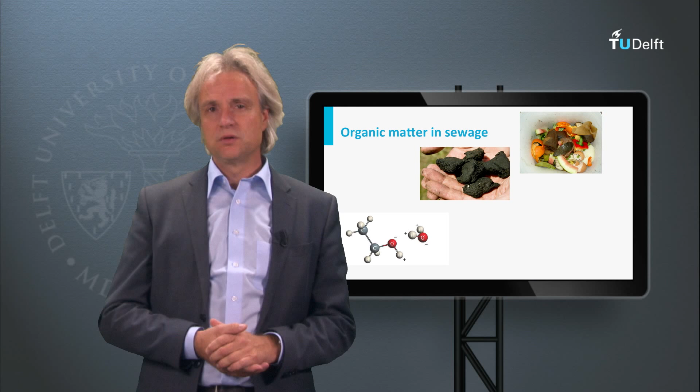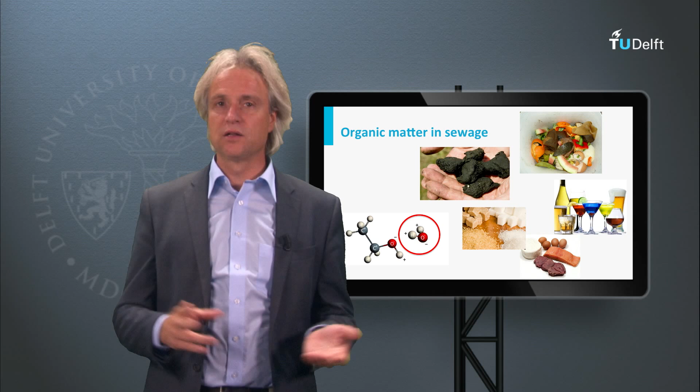The largest fraction of contaminants in domestic sewage consists of organic pollutants. Since water is a polar compound, it's an ideal solvent for many organic pollutants associated with our food chain, such as sugars, proteins, ionized compounds, and alcohol. Can you think of an organic compound that hardly dissolves in water? Maybe fats. The lower the polarity of a compound, the lower its solubility, but we still find them in our sewage and thus in our treatment system.

In addition to dissolved compounds, the used water carries a lot of suspended matter. These suspended solids can be organic in nature, such as food leftovers thrown in the kitchen or fecal matter from our toilets, but also inorganic, such as clay and sand particles, or when flows are high, even small stones.

Water is mostly used for transport of reactants to, and transport of contaminants from, the site of industrial and/or agricultural production or household appliances. The carrying capacity of water is determined by a number of factors. Some relate to the physical-chemical nature of the pollutant, such as polarity, maximum solubility, and degree of ionization. Others depend on the type and extent of the sewage system, local weather conditions, and flow velocities in the conveyance pipes.

Now think for yourself and imagine at least 10 compounds that come to mind that you certainly will find in the sewage.

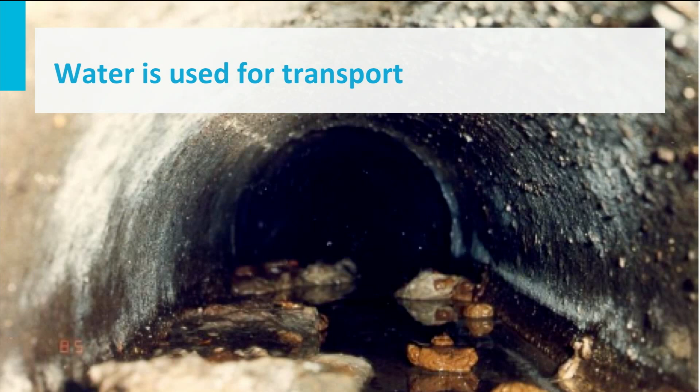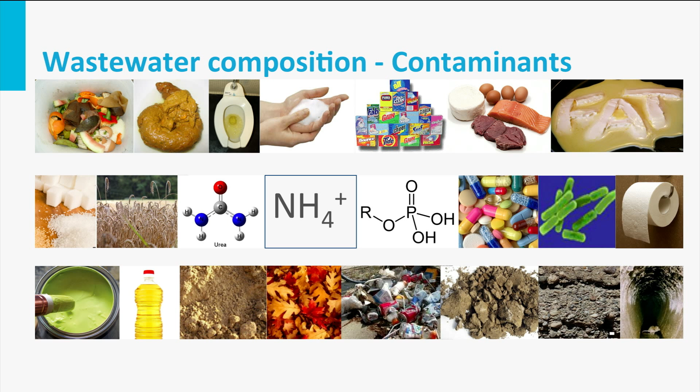Kitchen waste, fecal matter, urine, soaps, detergents, proteins, fats, sugars, fibers, urea, ammonium, phosphates, medicine residue, pathogenic bacteria, toilet paper, chemicals that don't belong there such as paint, vegetable oil, sand, leaves, tree dust, clay, stones, mice, rats, everything. I guess that matches more or less with your imagination, right?

Now the question: why should we remove these compounds? Why are they harmful?

Discharge of organic compounds leads to surface water pollution, possibly resulting in oxygen depletion. The actual impact on the dissolved oxygen concentration depends on the composition and concentration of the specific compounds, as will be discussed in the coming lectures. Since the exact nature of the organic compounds is not known, organic matter is determined in analytical tests. Based on the type of test, the organic matter content is expressed in grams of chemical oxygen demand, or COD, or grams of biochemical oxygen demand, or BOD. The fundamental background of these tests will be discussed in another lecture.

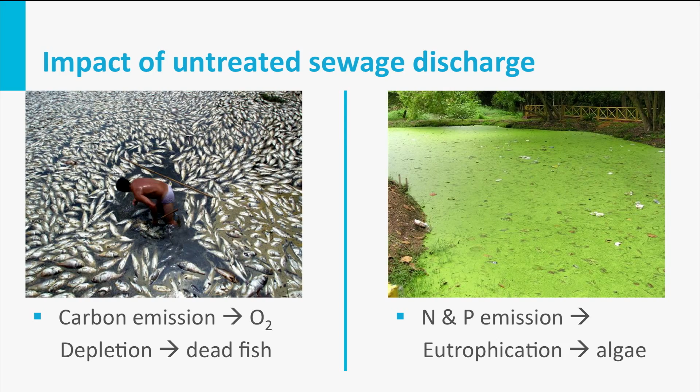In addition to carbon pollution, the sewage is full of nutrients, nitrogen and phosphorus. The presence of these fertilizers in surface water leads to eutrophication, resulting in high algae growth or algae bloom. By the massive growth of algae, other species will hardly have the chance to flourish in these waters, leading to a loss in species diversity. Moreover, after starvation, the dead biomass will also lead to oxygen depletion in the receiving surface waters. Therefore, effluent restrictions of sewage treatment plants generally include both organic matter and nutrients.

The natural carbon, nitrogen and phosphorus cycles, as well as the imbalances in these cycles, will be explained in much more detail when we discuss the biological processes in sewage treatment plants.

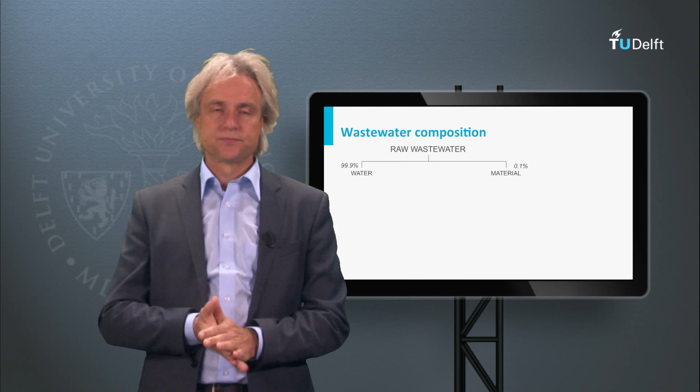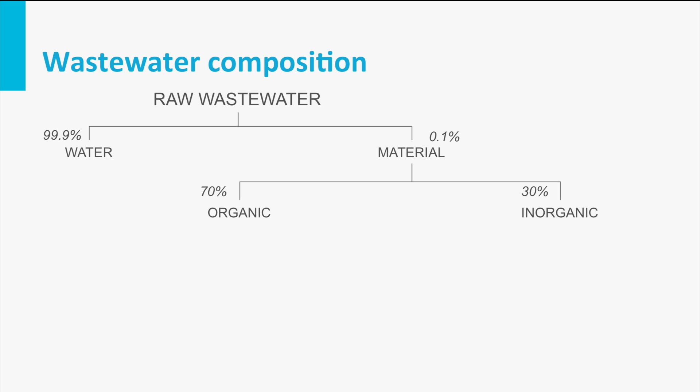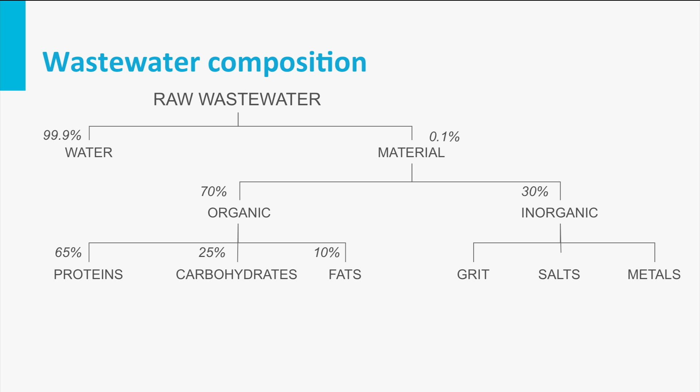Back to the wastewater. Wastewater is composed of almost 100% water. The polluting mass is only a very small fraction of the total mass. Of the polluting mass, about 70% is organic and about 30% is inorganic. The organic fraction consists of 65% proteins, about 25% sugars, and about 10% fats. Local conditions may differ distinctly from these average values. The inorganic fraction consists of sand and grit, salts, and metals.

Part of the pollutants are present in soluble form, whereas a large part is suspended. How do we quantify the solids present in the sewage? Suspended solids quantification is based on their settleability, their size, and their organic or inorganic nature.

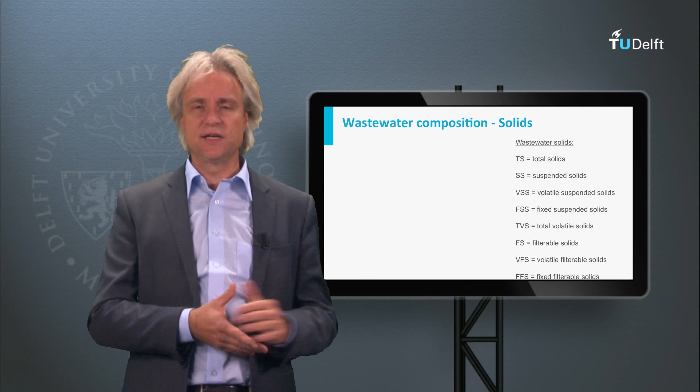Now let's start with a sewage sample and first check what part of the solids is settleable. The settleability of the solids is an important characteristic when we apply downstream solid separation. Under standardized conditions, the amount of settleable solids is determined by using an Imhoff cone.

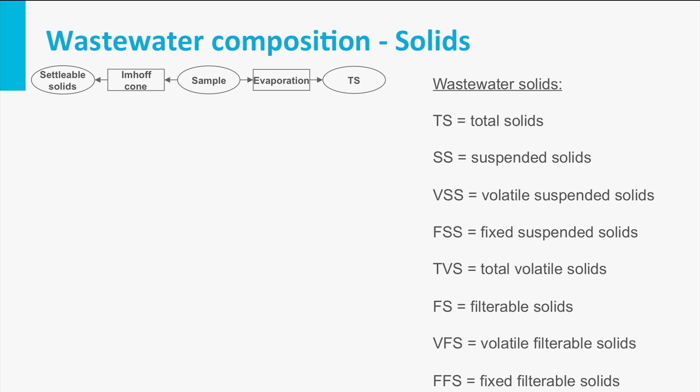Alternatively, if we evaporate all the water of the original sample, the residue is called total solids, or TS. By means of a filter with a certain mesh size, we may differentiate between the filterable dissolved solids, like ions or sugars, and the suspended solids.

If we burn the solids fraction in the muffle oven at 550 degrees Celsius, we obtain the volatile suspended solids, or VSS, and the ashes, or fixed suspended solids, FSS. The oven-treated filterable fraction will give us the volatile filterable solids and the fixed filterable solids.

Now, by summing the appropriate fractions, as shown in this slide, we can close the mass balance and arrive at the total solids again, which must equal the initial amount after evaporating all the water.

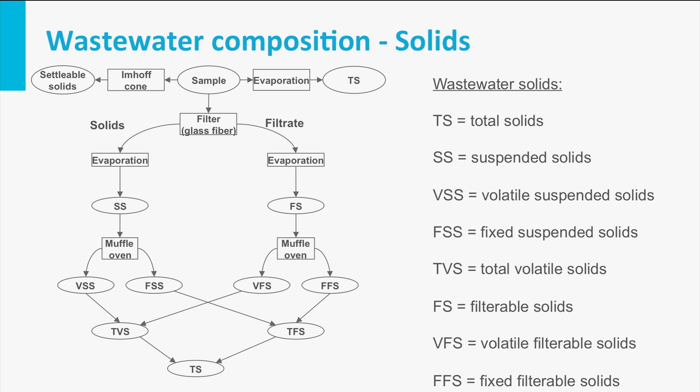A practical example is given in this slide. Just have a close look, stop this video, and do these simple calculations by yourself.

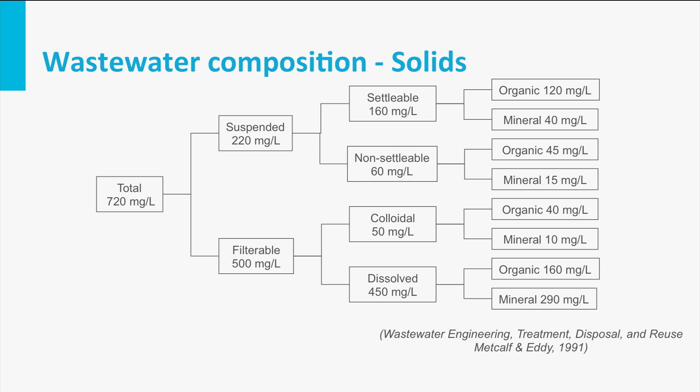The characterization of sewage is important to understand what impact the discharge of untreated sewage will have on the environment. Alternatively, sewage characterization is performed in order to be able to dimension a sewage treatment plant.

The sewage characteristics are firstly dependent on the type of collection system or sewage system that we apply. Flow rates and expected fluctuations depend on the extent of the sewerage and whether rainwater is collected by the same system, as we discussed in the previous lecture.

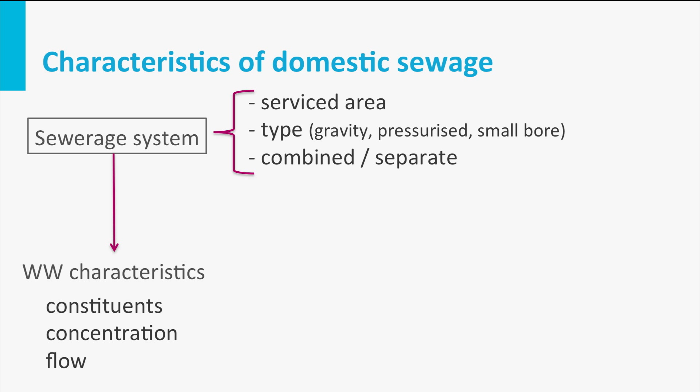The flow and pollutant concentration are then used to design the treatment plant. After treatment, the effluent is again characterized in order to check whether discharge or reuse standards are met.

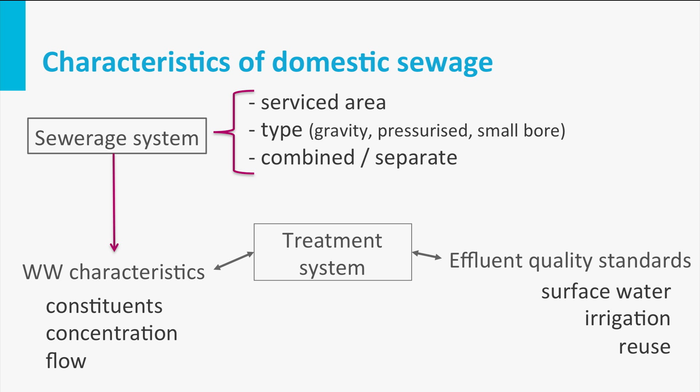The present slide lists the average concentration of key pollutants in sewage in the Netherlands. In addition to BOD, COD and suspended solids, also concentrations of nutrients, nitrogen and phosphorus are given.

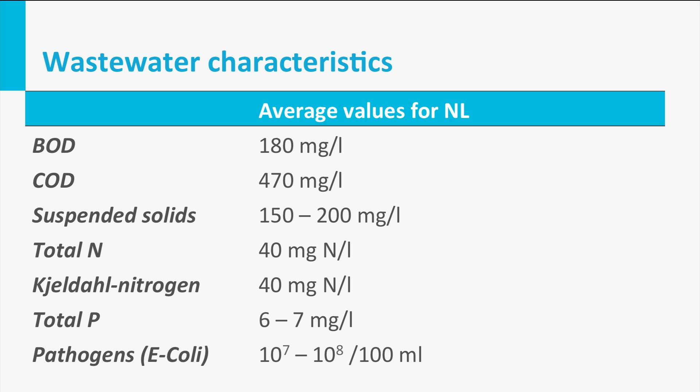Both nutrients can be present as inorganic compounds, such as ammonium, nitrite, nitrate, orthophosphate, or they are bound to organic matter. Particularly the presence of reduced nitrogen compounds needs to be carefully assessed at the STP in both the influent and the effluent, since reduced nitrogen needs to be oxidized in the reactor before discharge to the environment.

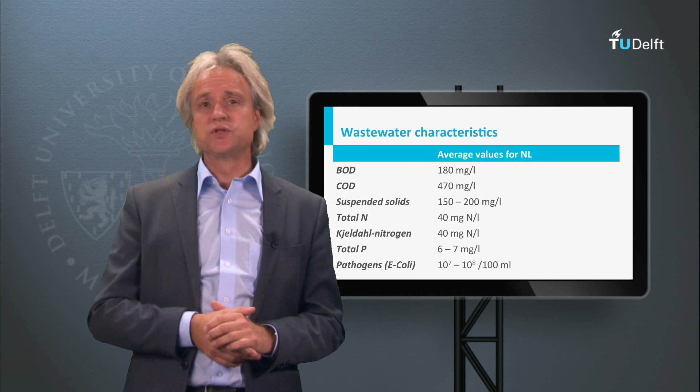The total amount of reduced nitrogen is measured by the Kjeldahl method, a destructive technique in which all reduced N is made free from organic matter. The released organic N, as well as the ammonium, is measured in this test.

What does it mean that the concentration of total N and Kjeldahl N are about the same in the sewage?

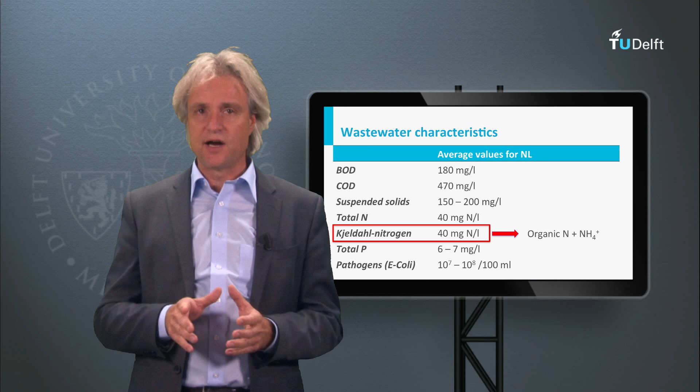For phosphorus, generally total P is measured, which includes both the phosphorus bound to the biomass and the free reactive orthophosphate.

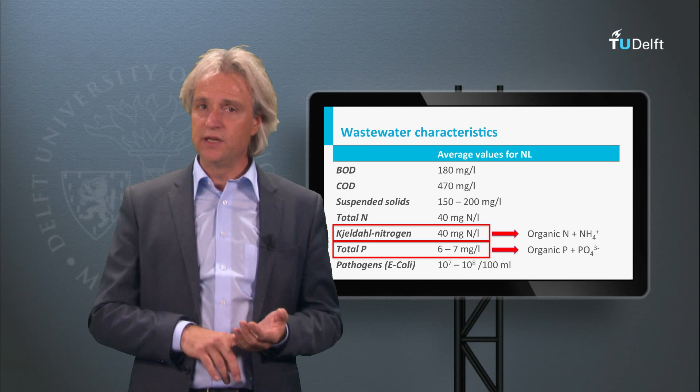Our sewage can be characterized as dilute, having the following average concentrations: BOD of 180 mg per liter, COD 470, Kjeldahl nitrogen 40, total N 40, total P 6 to 7, and suspended solids 150 to 200.

The large presence of suspended solids in the influent indicates the rather complex nature of organic pollutants entering an STP.

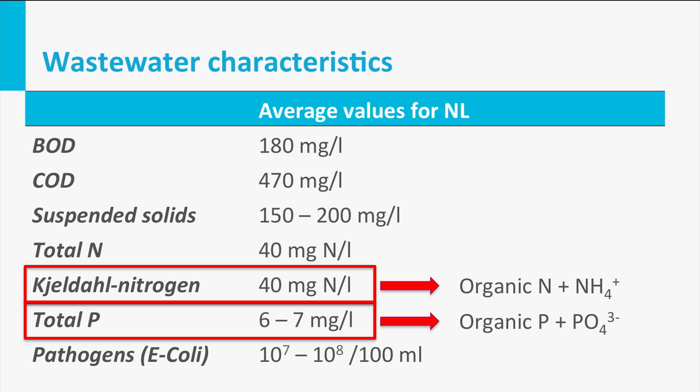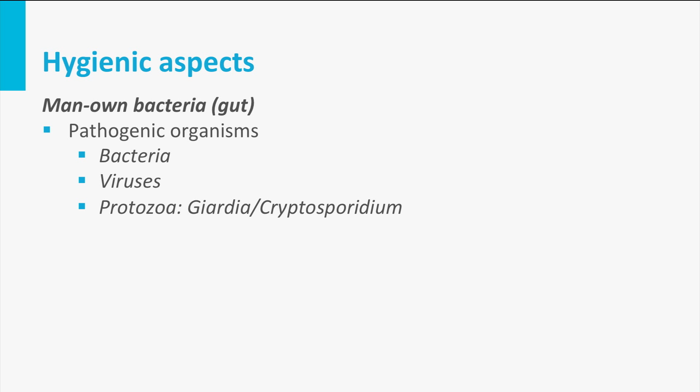Next to the biochemical compounds, the influent is contaminated with huge numbers of human pathogens. The average pathogen concentration, measured as the number of indicator organisms, E. coli, is about 10 to the 7, 10 to the 8 per 100 ml.

In addition to E. coli, the influent contains high numbers of other bacteria, viruses, and protozoa like Giardia and Cryptosporidium. During activated sludge treatment, no more than 1 to 2 log units of pathogenic organisms will be removed.

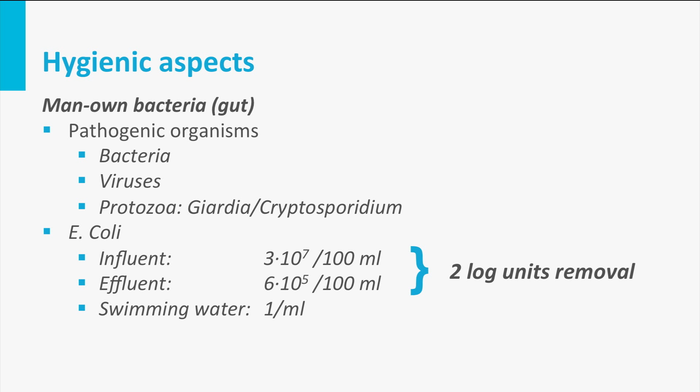Notably, pathogens are not removed in our sewage treatment plants. Only in those cases where the effluent is discharged to surface water where public bathing is allowed, pathogens need to be removed to less than 1 per ml.

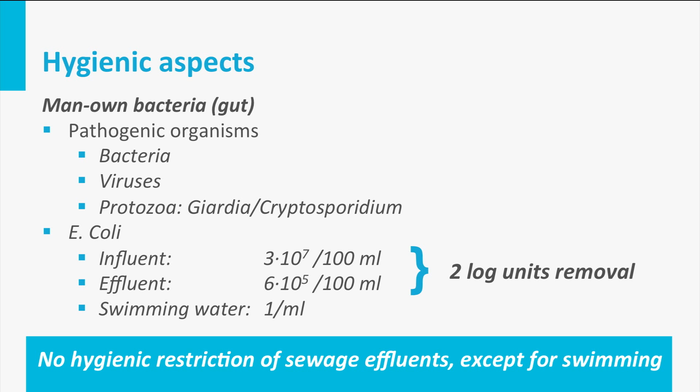You can imagine that these large differences will impact the type and design of the required treatment plant. Also, climate conditions, such as ambient temperature, will have an impact on system layout and process design.

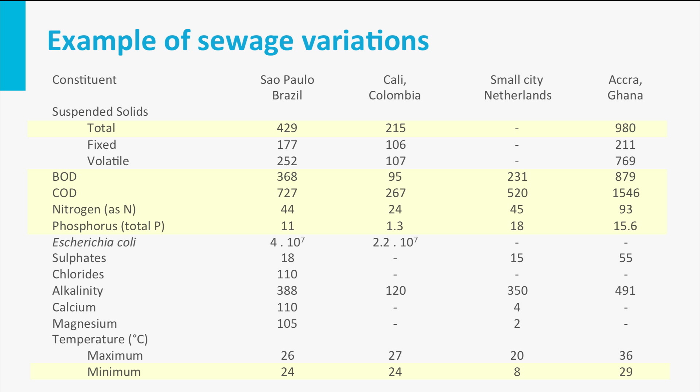And what are the criteria that should be reached in the effluent of the STP?

Since the installment of the Dutch Water Service Act in the 70s, the oxygen-requiring pollutants and suspended solids were restricted for discharge. Effluent restrictions for BOD was 20 mg per liter, for Kjeldahl nitrogen 20 mg per liter, and for suspended solids 30 mg per liter.

In the 90s of the past century, restrictions for nutrients were adopted, resulting from international agreements as outlined in the North Sea Treaty. Effluent restriction for phosphorus was set to 1 to 2 mg P per liter and nitrogen to 10 to 15 mg N per liter, depending on the size of the treatment plant. As a result of the stringent nutrient criteria, the effluent BOD concentrations dropped considerably.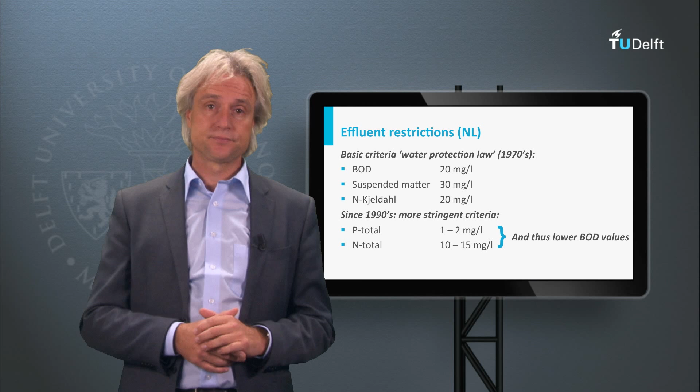At present, the effluent nutrient concentrations are revisited as outlined in the European Framework Directive, particularly for large STPs and those STPs located in ecologically sensitive zones.

In various STPs in the Netherlands, effluent nitrogen and phosphorus concentrations already need to comply with lower standards, as low as 2.2 mg N per liter and 0.15 mg P per liter.

These are being discussed, which will put very high pressure on all operational STPs. For practical reasons, 5 mg N per liter and 0.3 mg P per liter are the more stringent criteria for nutrients which are now being adopted in the Netherlands.

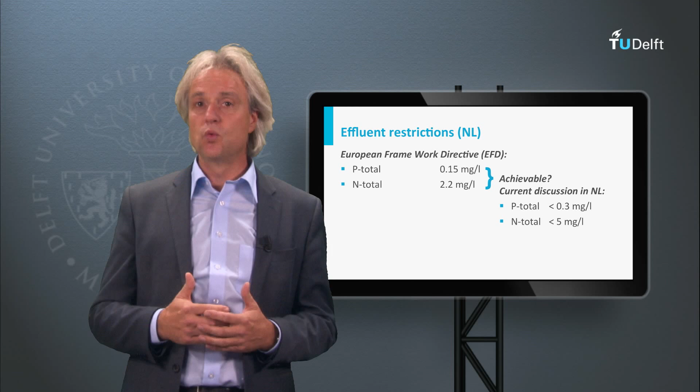Other health and environmental concerns within our current sanitation system include the increasing presence of priority pollutants, medicine residues, and endocrine disruptors in the effluent.

Also, residual chlorine in the effluent, when applied, or volatile compounds leaving the treatment plant with aeration, are compounds of concern, but yet they are not in the effluent restrictive guidelines.

As discussed in our previous lecture, heavy rainfall may result in combined sewer overflows, or CSOs. Since more periods of heavy rainfall are expected owing to climate change, uncontrolled discharge of dilute, non-treated sewage is a growing concern.

Despite the growing concern, appropriate monitoring techniques for the mentioned discharges are yet not implemented, and so far it is not known how these compounds will impact our drinking water resources in the future.

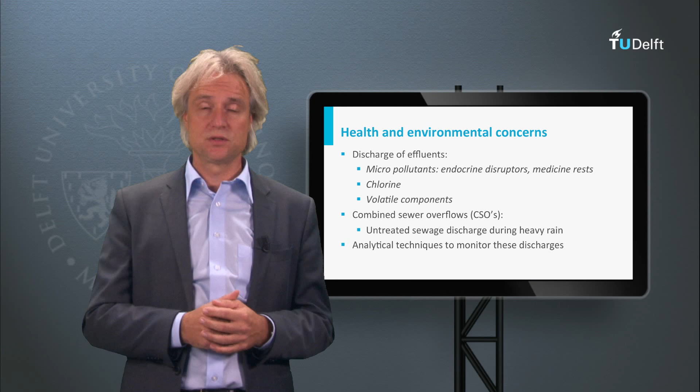Let's check the fundamental aspects of the COD and BOD measurements in our next lecture. Thanks for watching.